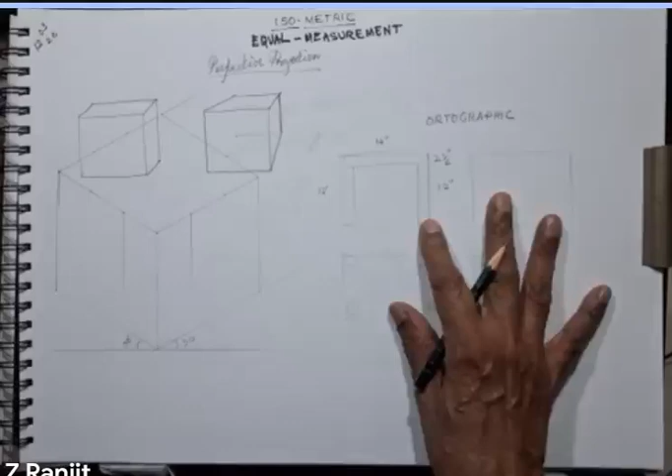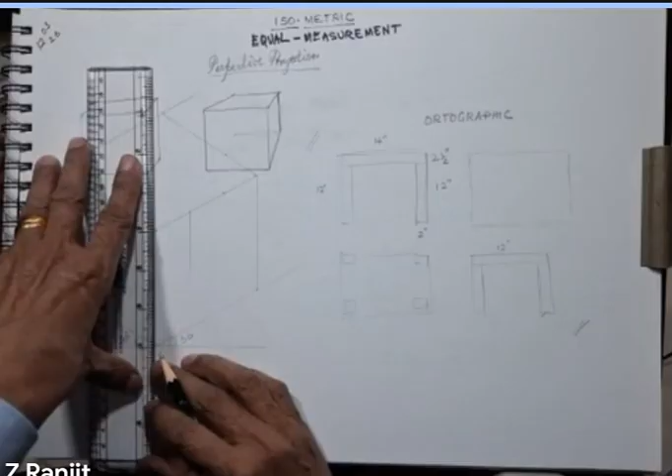Orthographic measurements will be giving measurements. Sometimes people would say orthographic drawing has to be actual size, but just imagine how huge it would be.

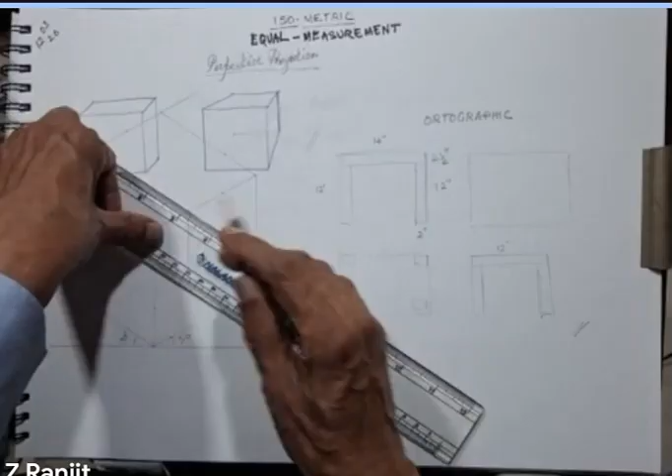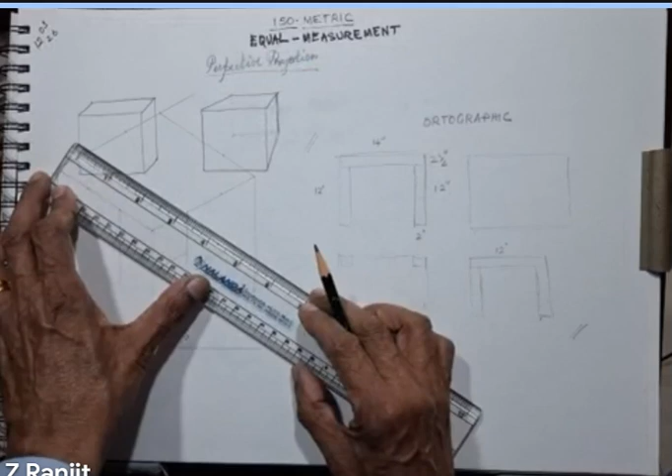This gives you a very clear idea of what you want to make. If this is done by engineers to be given to craftspeople, isometric drawings are done by engineers to be given to craftspeople, people who are going to be actually making the prototype or manufacturing. So this is an essential part of graphic drawing.

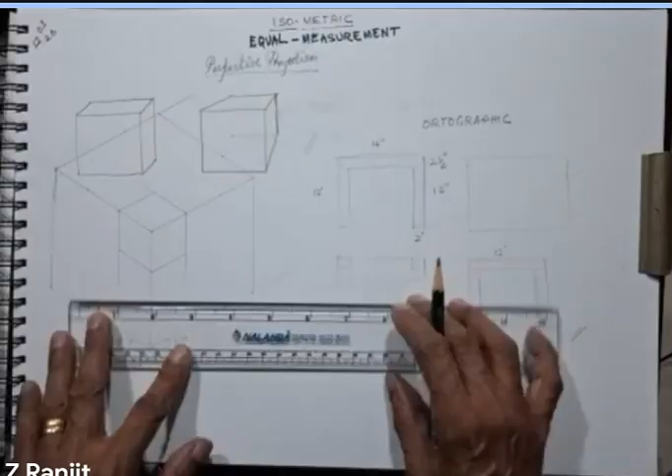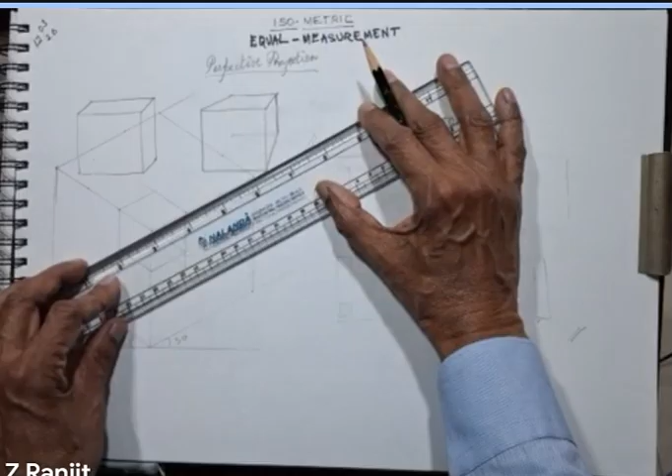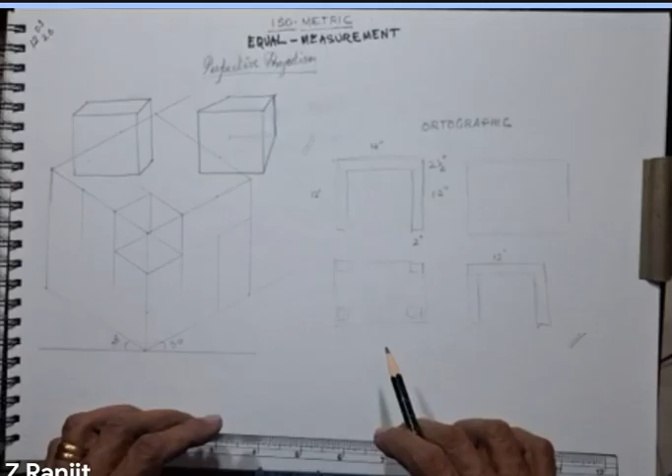Okay, we don't have much time. So I'll just explain this to you. Next class, we can go into this and complete a drawing.

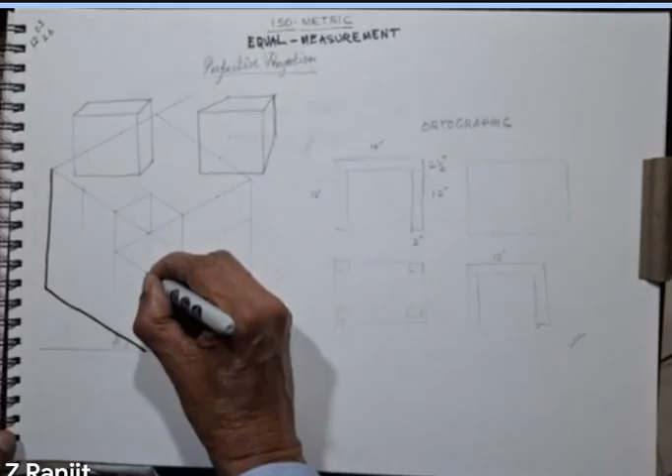Actually, all orthographic drawing should be done with scale, and the measurements have to be accurate. All isometric drawings have to be done with the scale.

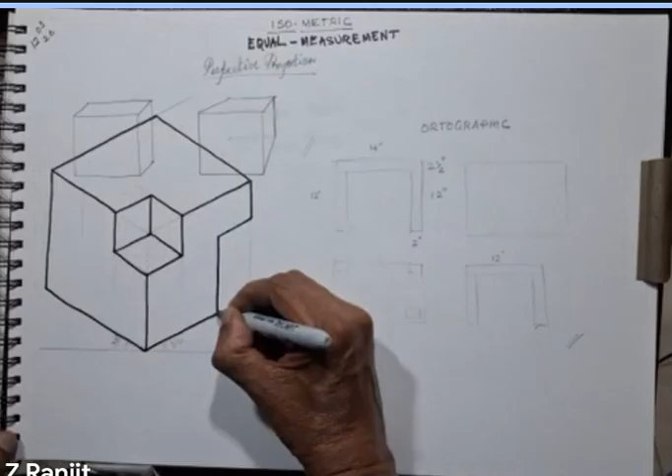Do we understand this? Do we understand this clearly?

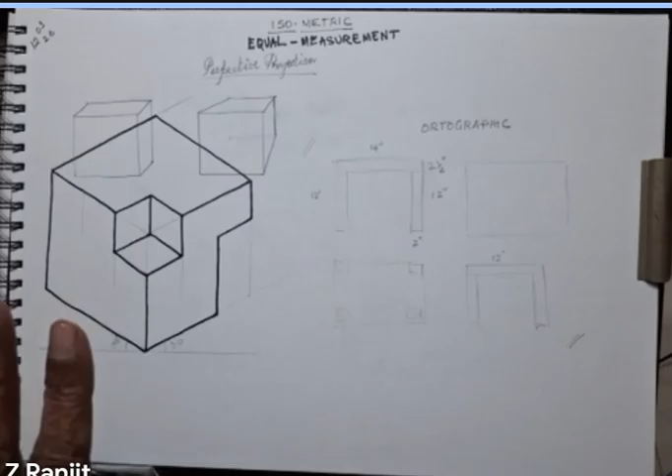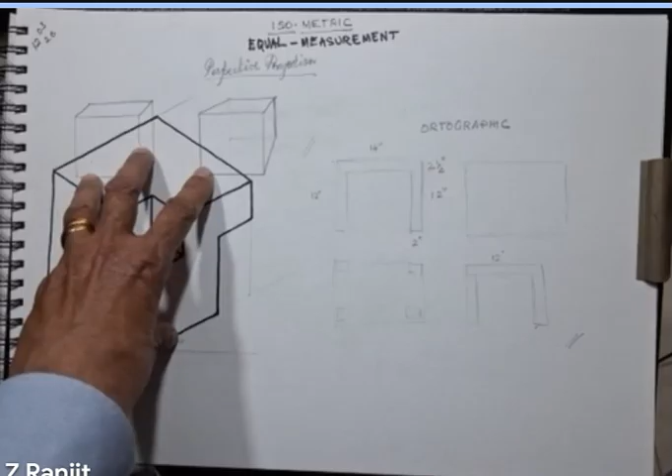So now, if I ask you to explain this, how will you explain this? This is a cube, and a cube is taken away from that. A cube has been cut in one edge from it, and pulled out. Now, this side we don't know what is happening.

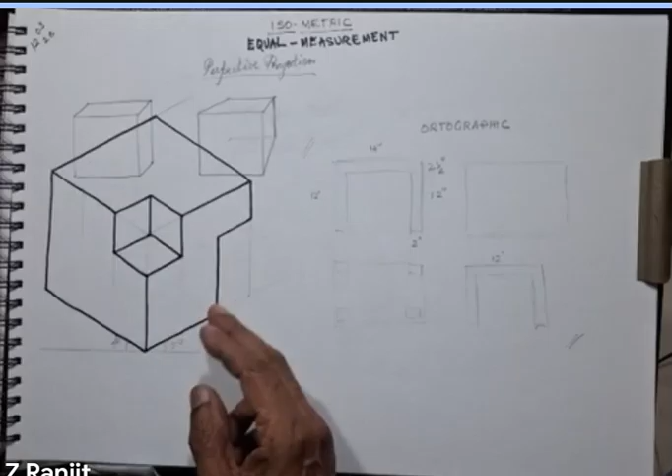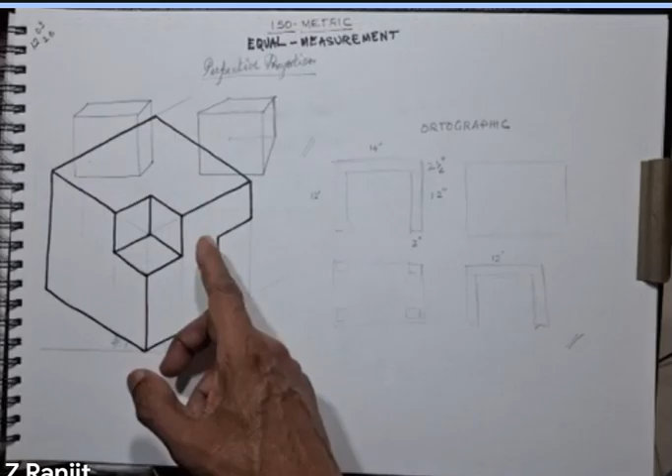But say it's a cube, 3 inches by 3 inches by 3 inches. A 1 inch by 1 inch by 1 inch cube has been taken off. Here, 2 inches high, 1 inch deep piece has been taken off. We don't know the other dimension.

Now, suppose we are standing here, this is isometric. This is isometric drawing.

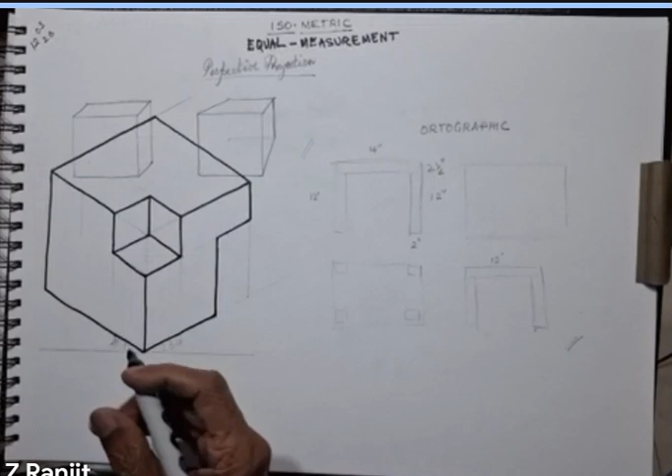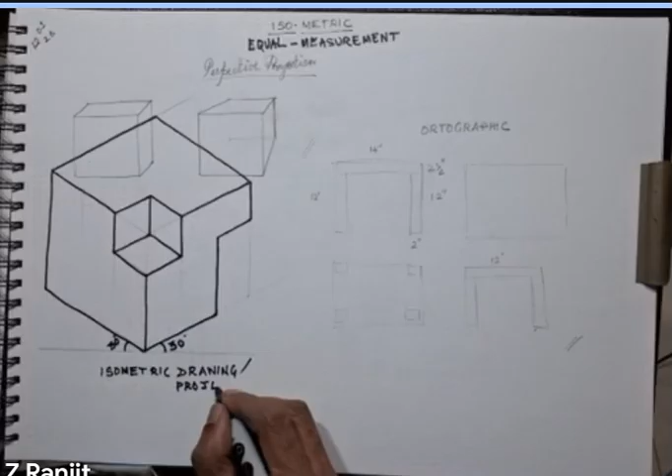Or projection. Projection, when we say what we mean is, suppose we have a slide, we put a light and project it onto a screen. Likewise, we have an idea, through our eyes and hands, we put it on paper. That's what we mean by projection.

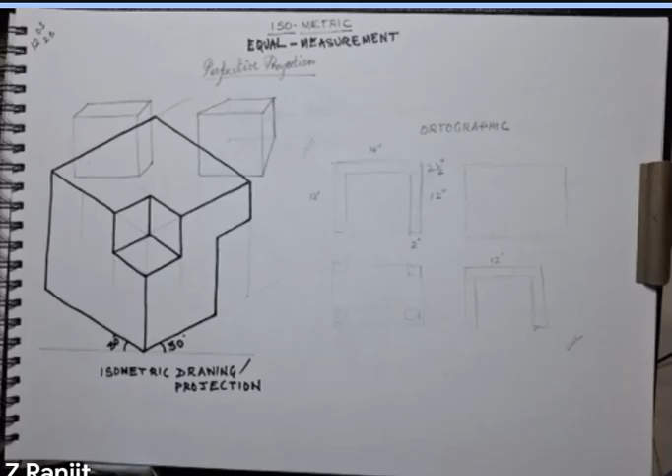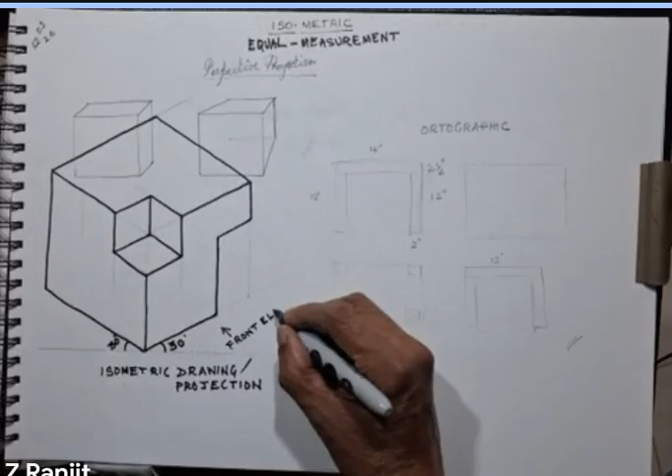Suppose we are standing here and seeing, we call that front elevation. Elevation, or we call it facade.

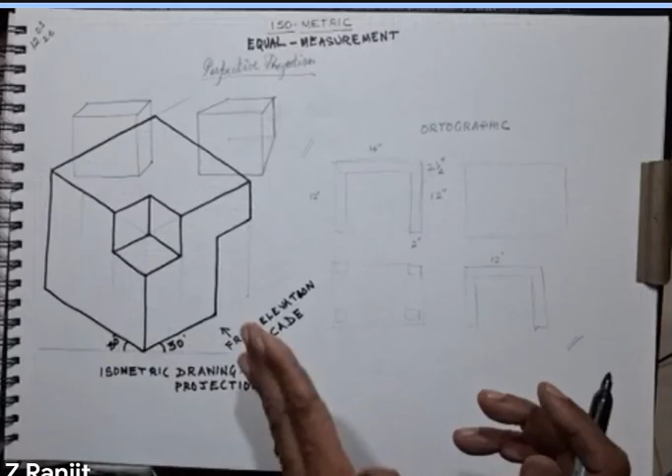Suppose this is the front. What is this side? Left side, right? Obviously, that is left side. Okay, so we call that.

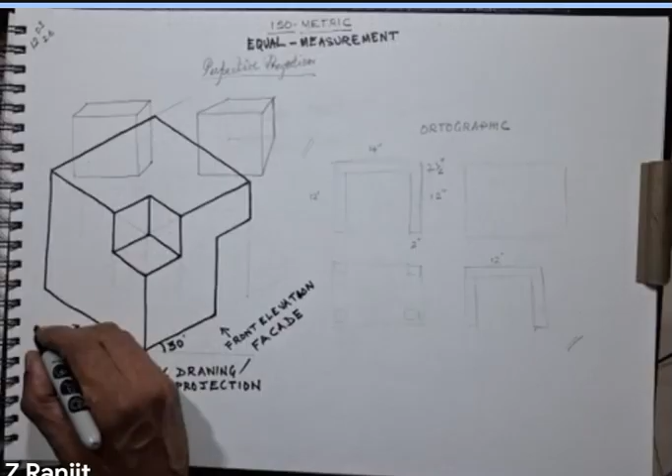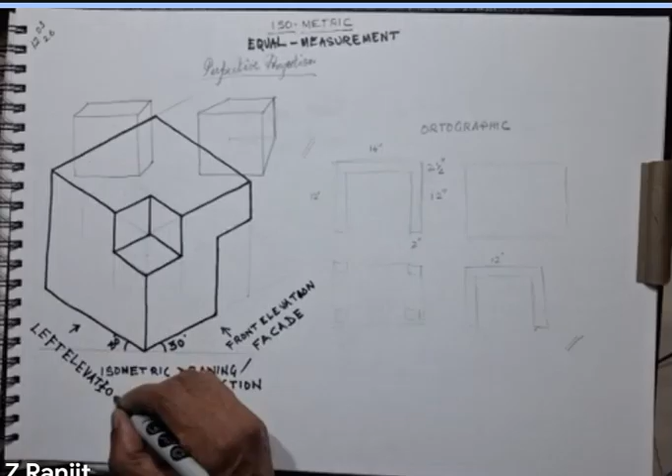We call this left elevation. What will we call that? That will be called right elevation, right? Yes, sir, that will be called right elevation.

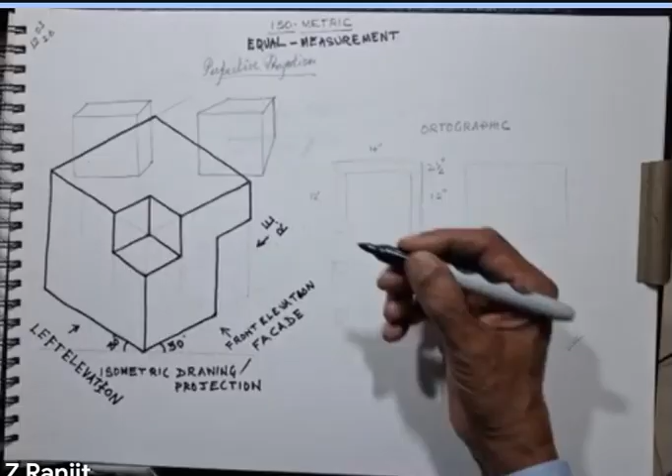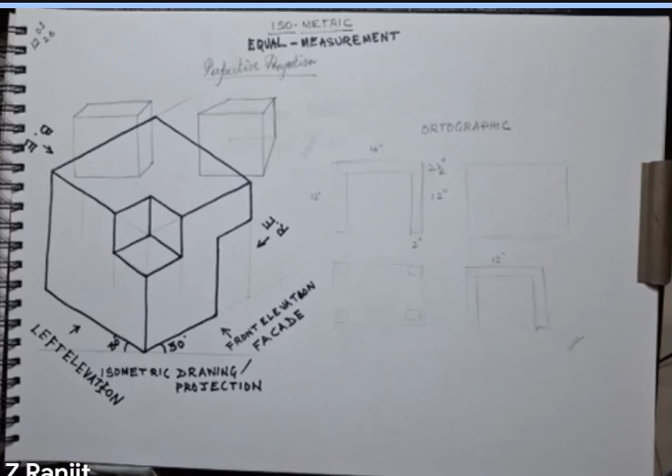That will be called back elevation, obviously, right? So all these can be different. That will be called back elevation. What will this be called? Top elevation - top, we just call it top. We generally don't call it elevation, we call it top.

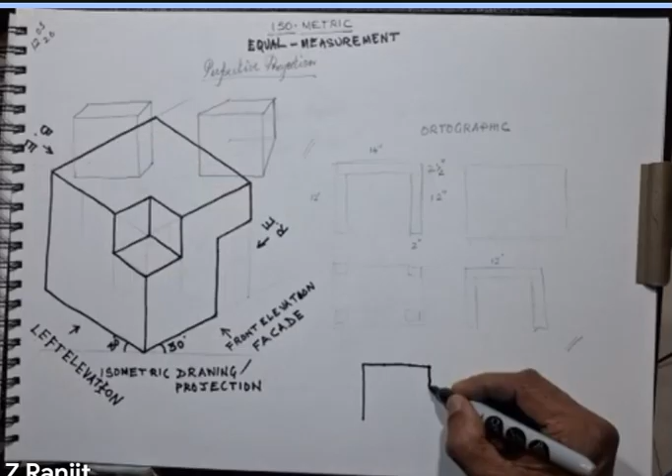So now I'm going to show you something. The top will be something like this. That will be the top.

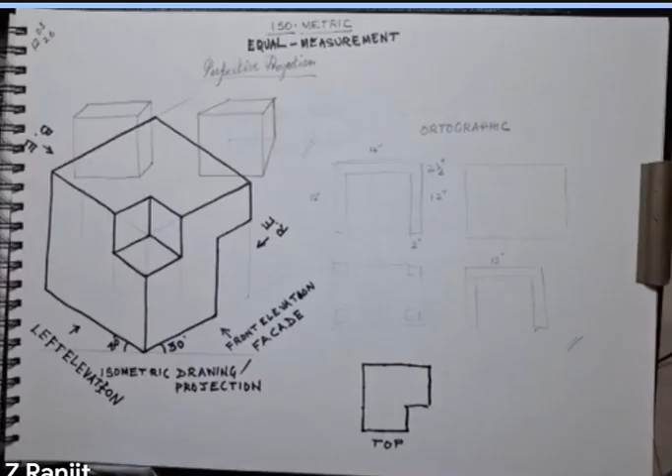The bottom will be called plan. Suppose, I'm going to take another color ink and show you what that side sort of is - not looks like, what is there. Okay, I thought I have a red, let me see, I think I have a red.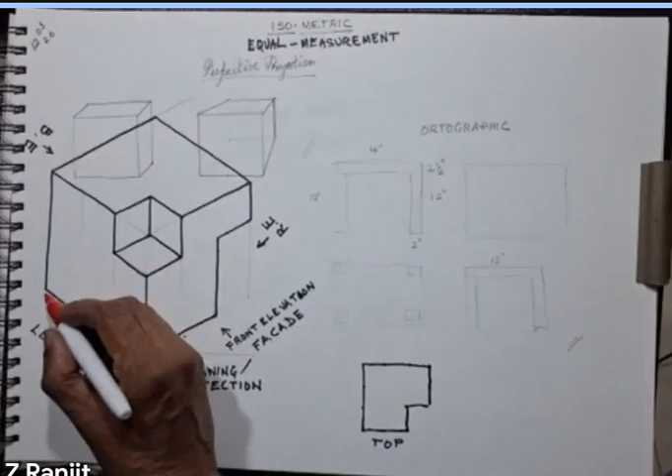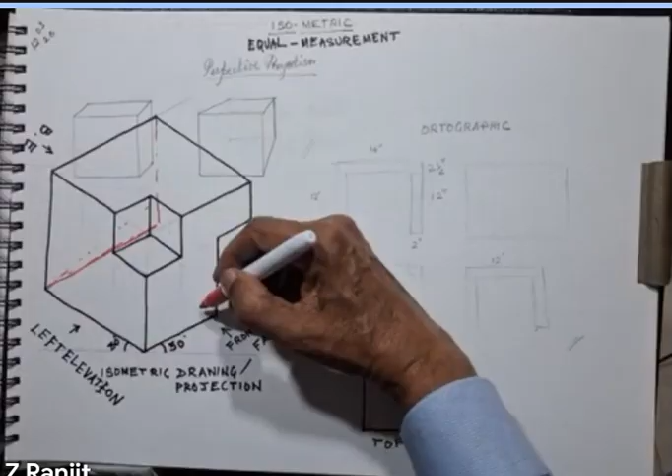Like that, it will be coming like that, right? And suppose this goes only up to that - this is 1, that is 2. It comes only up to that, up to that.

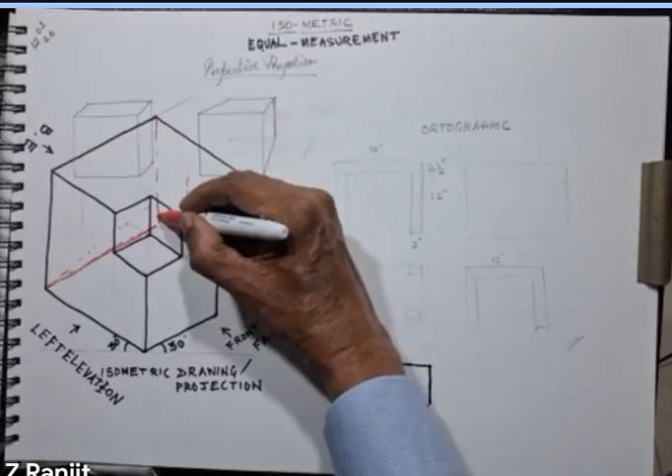This will go in, right? Like that. This will also come like that, right? This will go up, and be coming like that, and this will join here and here. And that gets a bit confused.

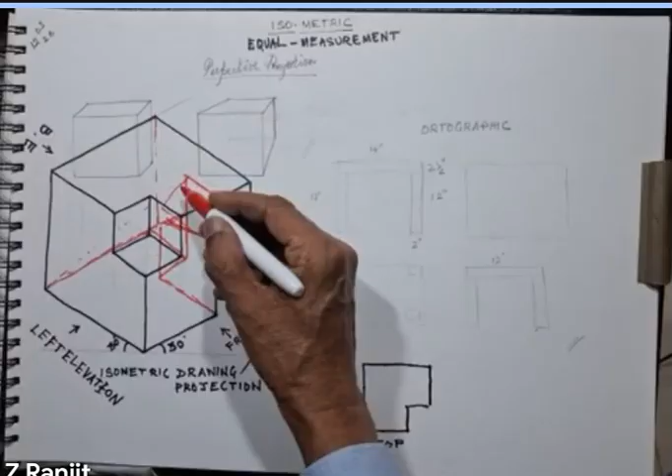This will be one wall. That will be another wall there. So that will be the open space. This open space is this.

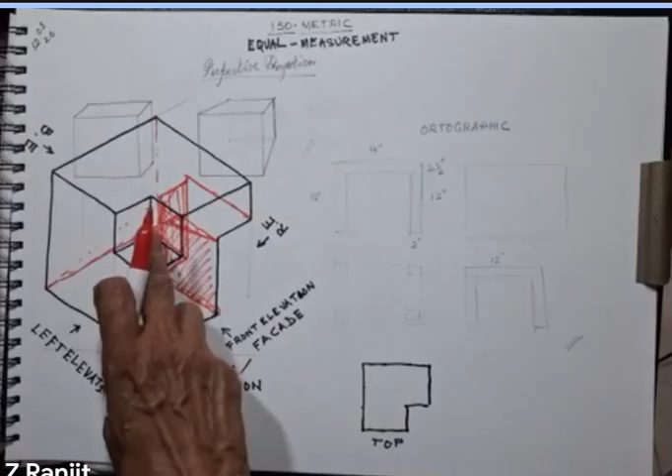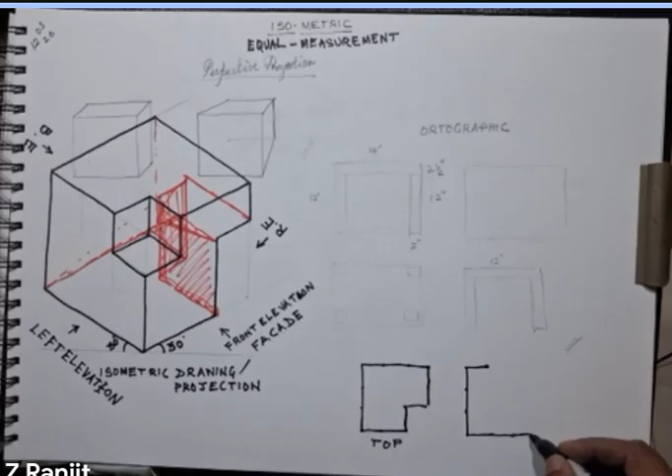If you go to the plan, what will the plan look like? It will look like that.

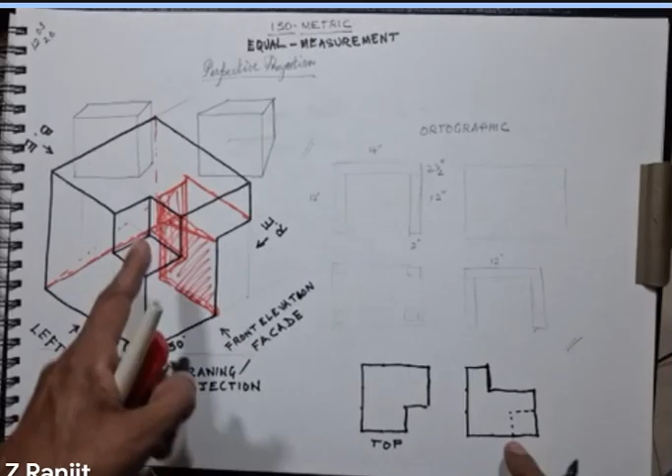And it will also have this as this cutting. This will be the plan, that will be the cutting. Here, the top will show that there is a cut off there. This is the plan.

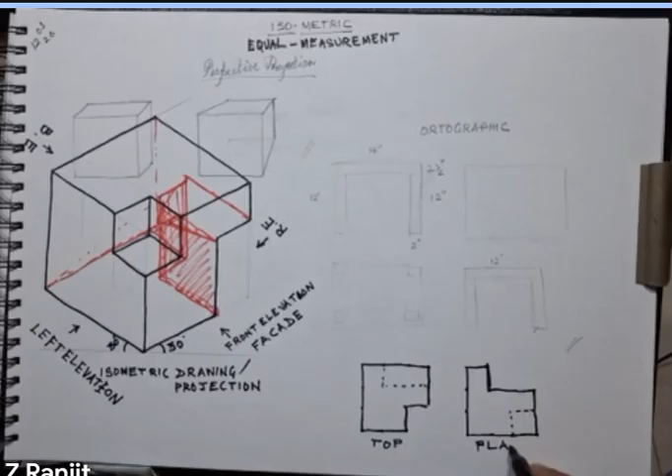With this, can you draw the back elevation? Can you draw this elevation, the right elevation? You can, right?

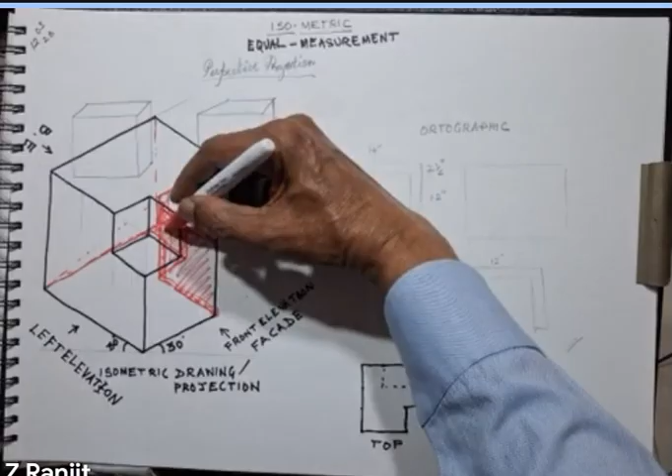Okay, this became slightly disturbing, but I will make that into a wall. Okay, this becomes a wall here.

What is the use of this? We'll talk about it later. But do you understand that if this is called the front elevation, if this is the front of this construction, of this object, that will be the left elevation. If you show just that, that will be the left elevation. If it turns like that, automatically it becomes the left elevation, right? Turn like that, it becomes left elevation.

And that's back elevation, that's the right elevation. This is the plan, this is the top. So 1, 2, 3, 4, 5, 6 - 6 sides.

Do we get it? No? Do we get it or not?

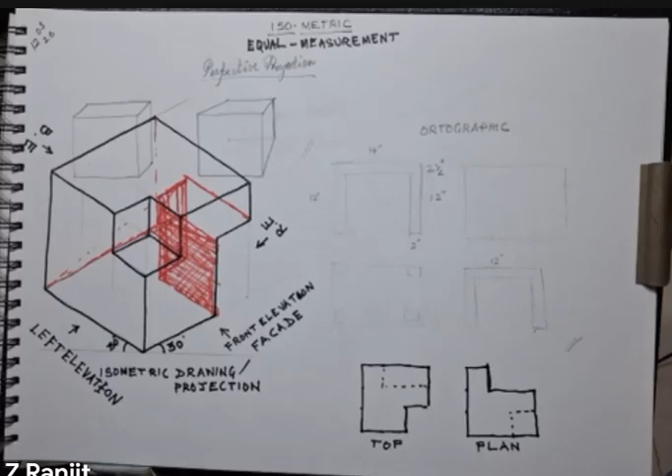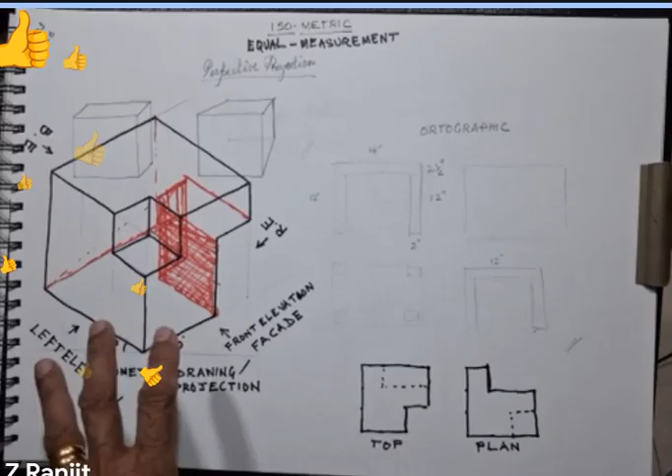What I'm going to do is give you two simple isometric front elevations, or two simple isometric drawings. I'll give you something that you can draw, and also I will give you top, plan, and other elevations, and you have to draw me an isometric drawing. Would you like to try that?

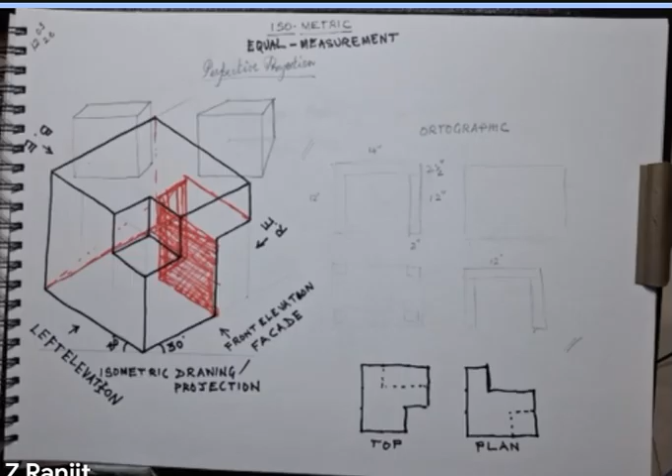Yes? Okay, so I will give you 6 drawings, and you have to draw an isometric elevation, projection. And you know how to do the 3-point perspective, right? You don't need any help from me for that. I have to send you some pictures as reference for your 3-point perspective.

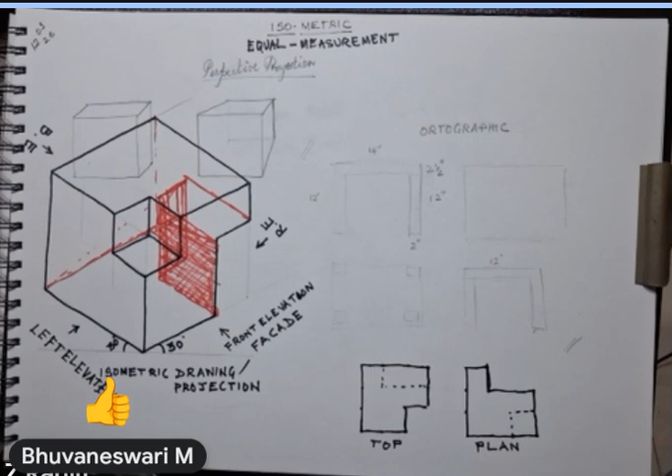Is there anything else that I have to send you? The syllabus that you said you will scan and send. Okay, syllabus, okay, yeah, that is it.